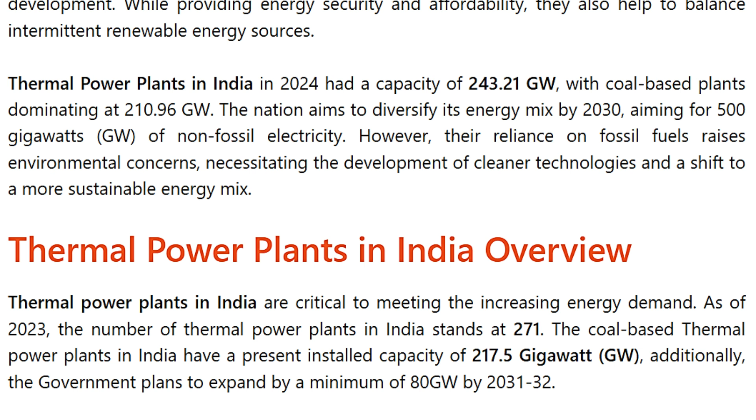Thermal power plants in India are critical to meeting the increasing energy demand. As of 2023, the number of thermal power plants in India stands at 271. The coal-based thermal power plants in India have a present installed capacity of 217.5 gigawatt. Additionally, the government plans to expand by a minimum of 80 gigawatt by 2031-32.

Currently, India has 27,180 megawatt of thermal capacity under construction, and the total anticipated thermal capacity addition by 2031-2032 is likely to be 87,910 megawatt. Since renewable energy has an intermittent nature, thermal power plants in India remain crucial for an uninterrupted supply of energy.

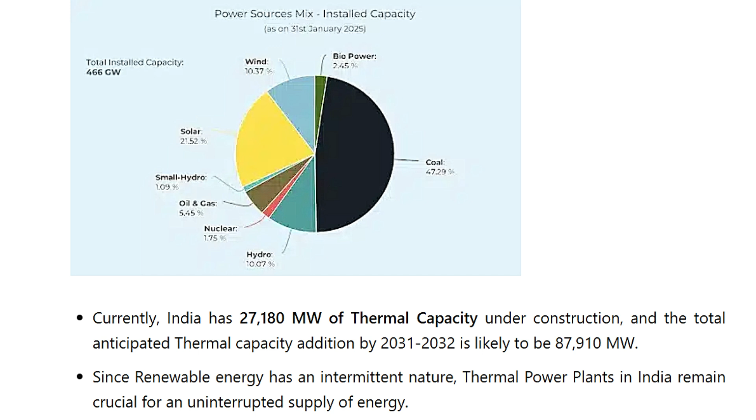Major thermal power plants in India include Vindhyachal Thermal Power Plant, Mundra Thermal Power Plant, Sasan Thermal Power Plant, and Tiroda Thermal Power Plant.

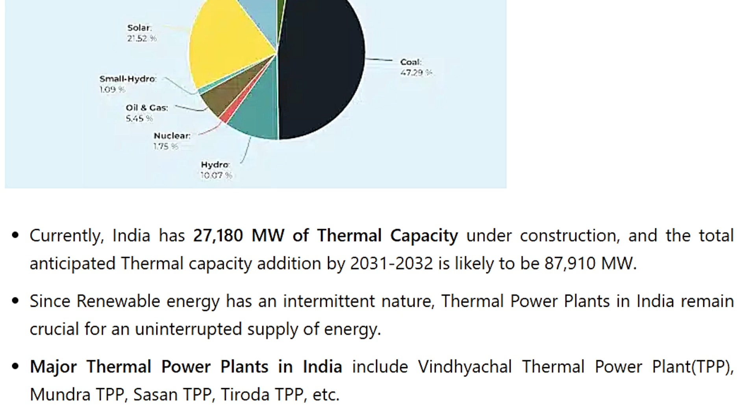The thermal power plants in India map shows the major thermal power plants in India. Thermal power plants are spread across India with a sparse presence in hilly regions. The map is shown below with major thermal power plants.

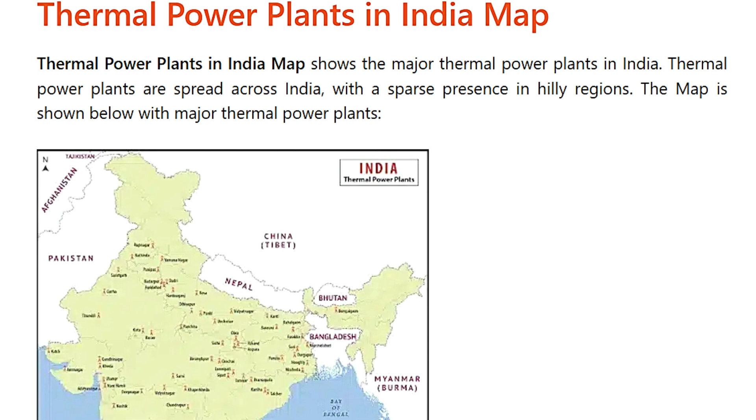Thermal power plants in India: types. Thermal power plants convert the heat energy of primary fuels like coal into electric power. In most thermal power plants, the combustion of primary fuel heats water and converts it to steam. The steam powers steam turbines which produce electricity.

The different types of thermal power plants include coal-fired, gas, diesel or liquid fuel, geothermal, biomass and waste material based thermal power plants. In India, thermal power is mainly generated from coal, lignite, diesel, naphtha and natural gas.

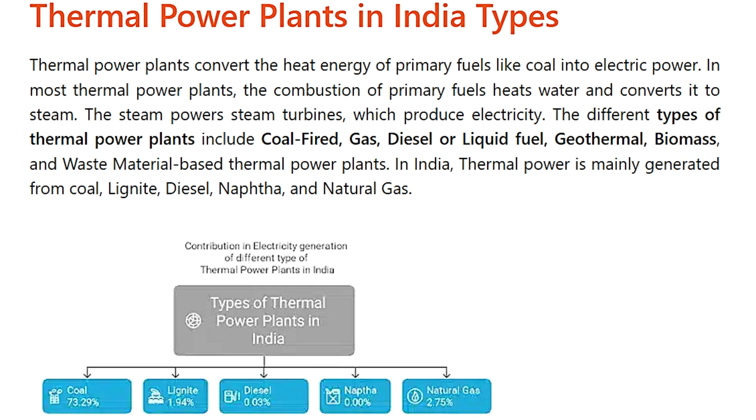List of thermal power plants in India. This list shows the major power plants in India with their location, type and capacity in megawatt as of 2023.

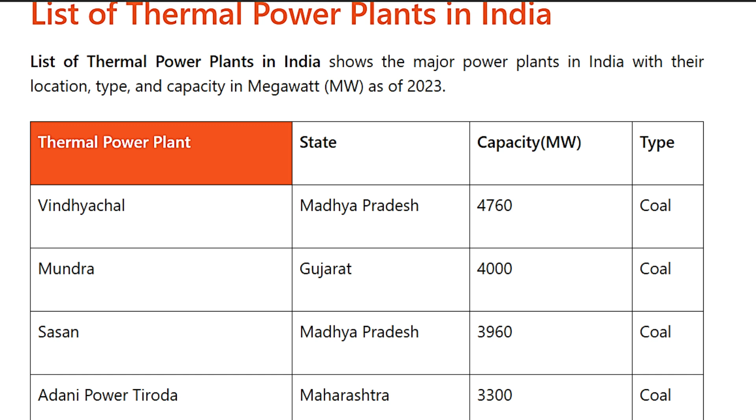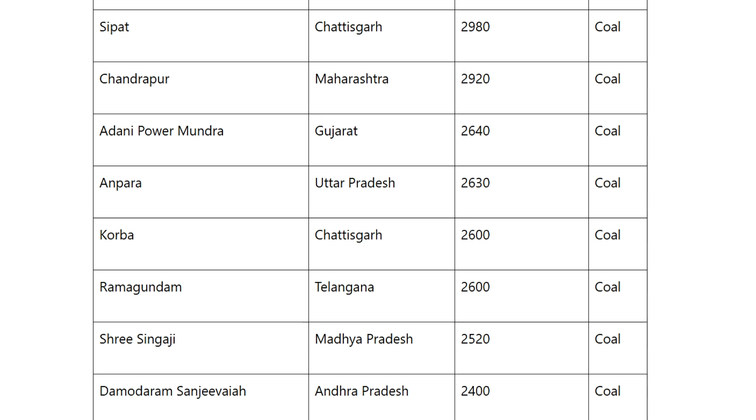Major thermal power plants in India are mainly coal-based and play a crucial role in India's energy landscape. The major thermal power plants in India include Vindhyachal Thermal Power Plant, Mundra Thermal Power Plant, Sasan Thermal Power Plant, Tiroda Thermal Power Plant, Rihand Thermal Power Plant, etc. These are discussed in detail below.

Vindhyachal Thermal Power Plant: it is India's largest thermal plant, located in Madhya Pradesh, Singrauli district, constructed in 1982. It has a 4,760 megawatt capacity and uses coal from the Nigahi mine.

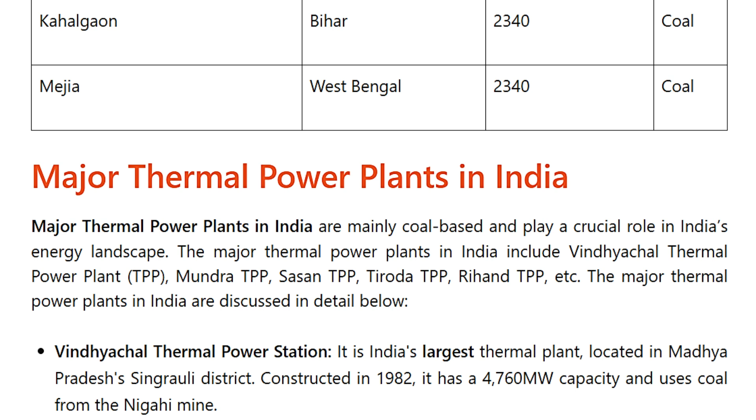Mundra Thermal Power Station: it is India's second largest, located in Gujarat's Kutch district, and has a capacity of 4,620 megawatt. Operated by Adani Power, it comprises 9 units and is primarily powered by imported Indonesian coal.

Sasan Ultra Mega Power Plant, in Singrauli, Madhya Pradesh, is among India's largest with a 3,960 megawatt capacity. Owned by Reliance Power, it features 660 megawatt units fueled by coal from the Moher and Moher-Amlohri mines.

Tiroda Thermal Power Plant, in Maharashtra, India, is a 3,300 megawatt coal-based facility owned by Adani Power Maharashtra. It operates 5 units of 660 megawatt each and uses supercritical technology to source water from the Wainganga River. The plant has advanced pollution control systems.

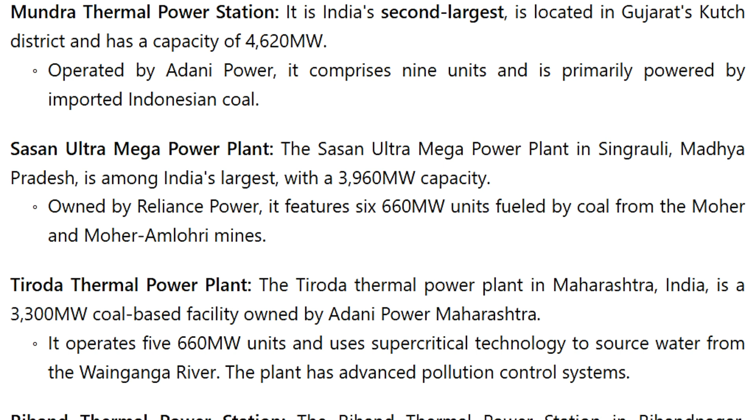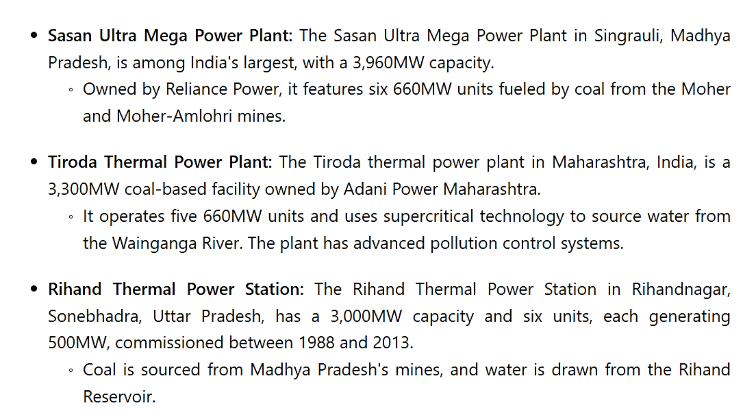Rihand Thermal Power Station. The Rihand Thermal Power Station in Rihandnagar, Sonebhadra, Uttar Pradesh has a 3000 megawatt capacity and 6 units, each generating 500 megawatt, commissioned between 1988 and 2013. Coal is sourced from Madhya Pradesh mines and water is drawn from the Rihand reservoir.

Thermal power plants in India: advantages. Thermal power plants in India are a major source of electricity, contributing significantly to the national power grid. Their benefits include a consistent energy supply, cost effectiveness, job creation, and reliance on proven technology, among others. The advantages are listed below in detail.

Reliable and abundant energy source. Thermal power plants, which typically burn fossil fuels like coal, oil, or gas, can generate electricity consistently, making them a reliable energy source, particularly when compared to intermittent sources like solar energy or wind.

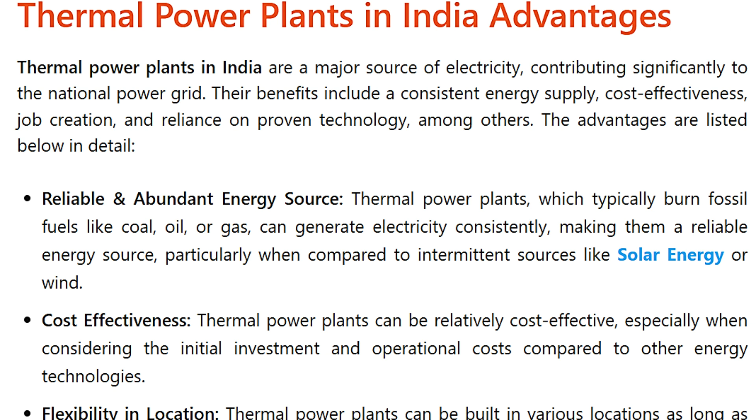Cost effectiveness. Thermal power plants can be relatively cost effective, especially when considering the initial investment and operational cost compared to other energy technologies. Flexibility in location. Thermal power plants can be built in various locations as long as there is access to fuel and water for cooling, making them adaptable to different geographical contexts.

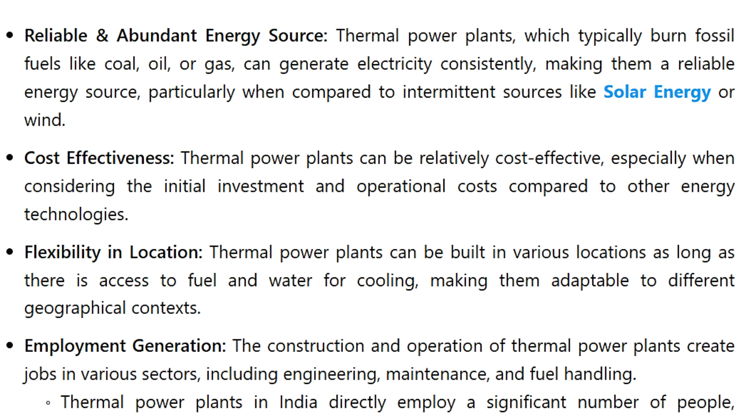Employment generation. The construction and operation of thermal power plants create jobs in various sectors including engineering, maintenance, and fuel handling. Thermal power plants in India directly employ a significant number of people, estimated at 3.2 to 4 lakh individuals. Support economic growth. The availability of electricity from thermal power plants is crucial for industrial operation, enabling manufacturing and other processes, and thus contributing to economic growth.

According to the National Electricity Plan document, the projected All India peak electricity demand and electrical energy requirement is 277.2 gigawatt for the year 2026-27 and 366.4 gigawatt for the year 2031-32.

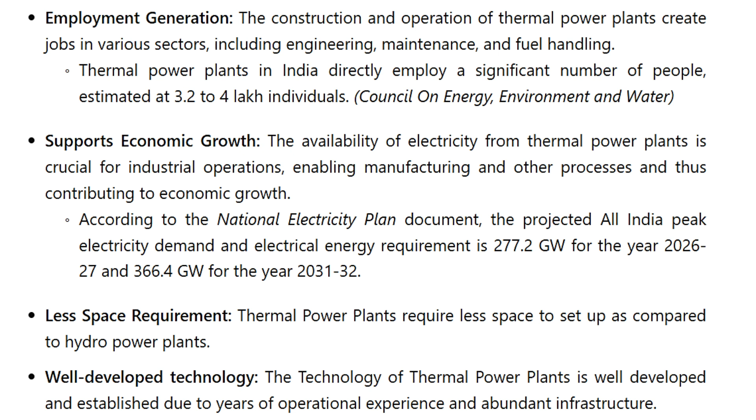Less space requirement. Thermal power plants require less space to set up as compared to hydropower plants. Well-developed technology. The technology of thermal power plants is well developed and established due to years of operational experience and abundant infrastructure.

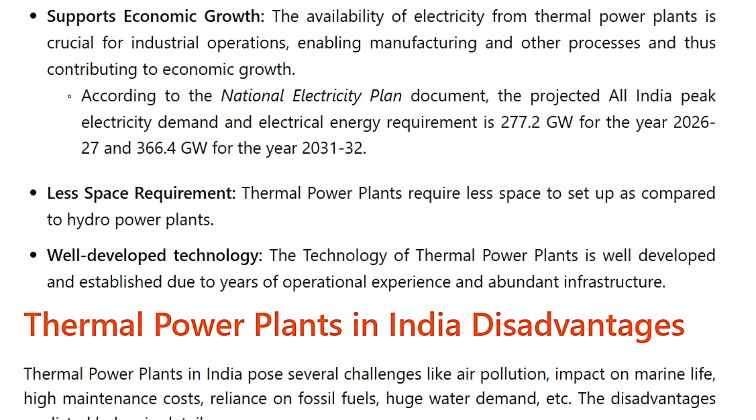Thermal power plants in India: disadvantages. Thermal power plants in India pose several challenges like air pollution, impact on marine life, high maintenance costs, reliance on fossil fuels, huge water demand, etc. The disadvantages are listed below in detail.

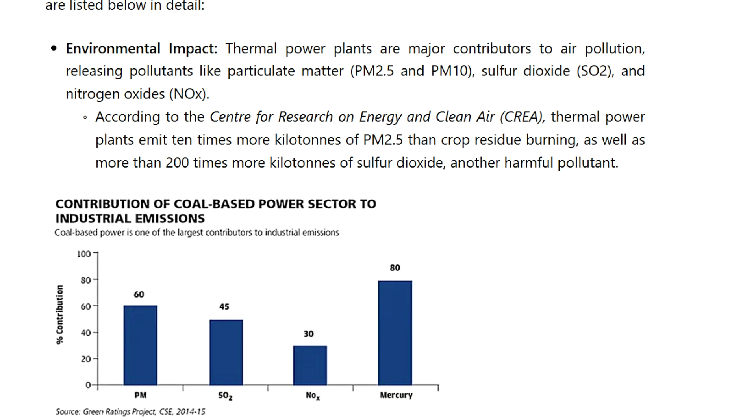Environmental impact. Thermal power plants are major contributors to air pollution, releasing pollutants like particulate matter PM2.5 and PM10, sulfur dioxide, and nitrogen oxides. According to the Center for Research on Energy and Clean Air, thermal power plants emit 10 times more kilotons of PM2.5 than crop residue burning, as well as more than 200 times more kilotons of sulfur dioxide another harmful pollutant.

Impact on aquatic life. Thermal power plants require large quantities of water for cooling, which can lead to thermal pollution of water bodies, harming aquatic life. Impact of fly ash. Thermal power plants release a high amount of fly ash, which can lead to significant air pollutants causing respiratory issues, soil contamination, and heavy metal leaching into groundwater, affecting plant growth and aquatic ecosystem.

High maintenance cost. Thermal power plants have higher operating cost compared to other electricity generation methods like hydro or nuclear energy, due to fuel cost and maintenance. Fuel dependence. Over-reliance on fossil fuels, especially coal, makes thermal power plants vulnerable to price fluctuation and supply disruption. Huge water demand. A thermal power plant requires a large amount of water for cooling, which can strain water resources, especially in regions with water scarcity.

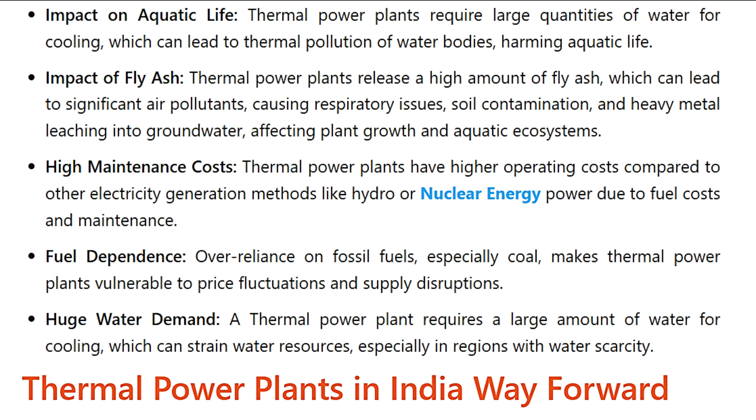Thermal power plants in India: way forward. Thermal power plants in India are crucial for maintaining grid stability and ensuring energy security by providing a reliable and consistent power supply. They complement intermittent renewable energy sources and reduce the risk of power outages and disruption.

The future of thermal power in India is expected to transition towards cleaner, more sustainable energy sources while maintaining a reliable and affordable power supply. To reduce the dependency on coal-based thermal power plants, India has planned to augment non-fossil fuel-based electricity generation capacity.